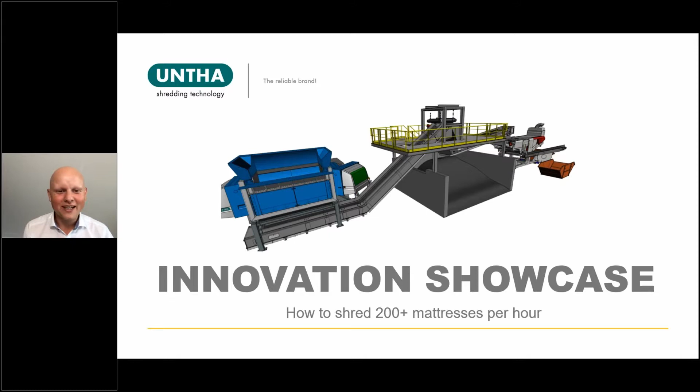With me now is Gary Moore, live from the UK, and he will talk about a very exciting thing. I'm excited about it for the whole day because I myself want to know as well how to shred over 200 mattresses per hour. Gary, I don't want to hold you up. It's your floor. Tell us all about it. Let's go.

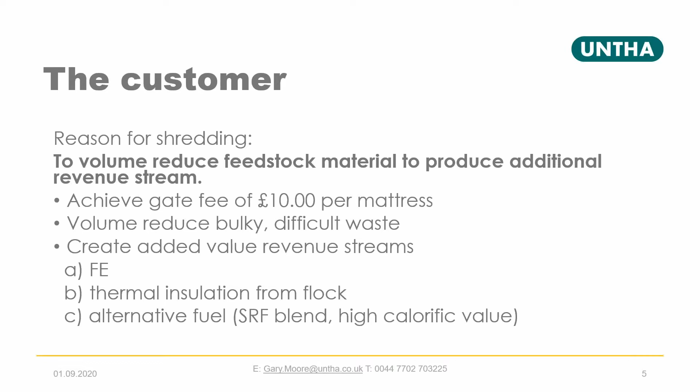Bulk density is approximately 180 to 200 kilograms per cubic meter, and the form is particularly in sizes can vary between a single, a king, a queen mattress. So all forms of mattresses are needed within this system to be able to process. They are post-consumer, and typically what we do with this material is to feed the shredder. We use a grab machine. It's easier to feed the shredder using this method than trying to pick up a lot of mattresses that tend to bounce and spring everywhere with a front end loader or similar telehandler equipment.

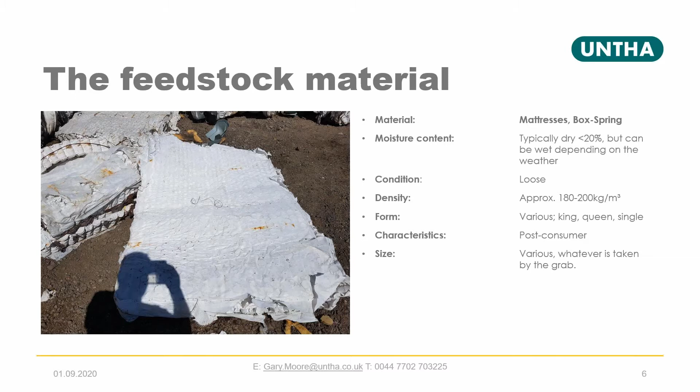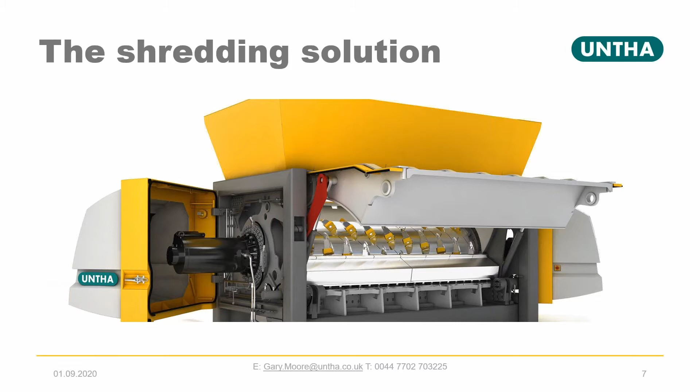The shredder, as I've said before, is the UNTHA XR 3000C, and the 3000 denotes that the cutting chamber length is 3 meters long. We also do a 2 meter version, but for processing mattresses, the 3 meter version is the preferred option in either a static version or a mobile version. We have 2 × 132 kilowatt drives, giving us a total power for this machine of 264 kilowatts. And the screen size we have for processing the mattress material is a 50mm standard screen.

Now, the reason that we're using a 50mm screen for this mattress product is because that size produces and liberates the flock or the polypropylene material from the FE, the ferrous material. The way that the rotor and the configuration of the cutters and the screen baskets interacts gives an extremely high and a very specific quality of separation and liberation of the material.

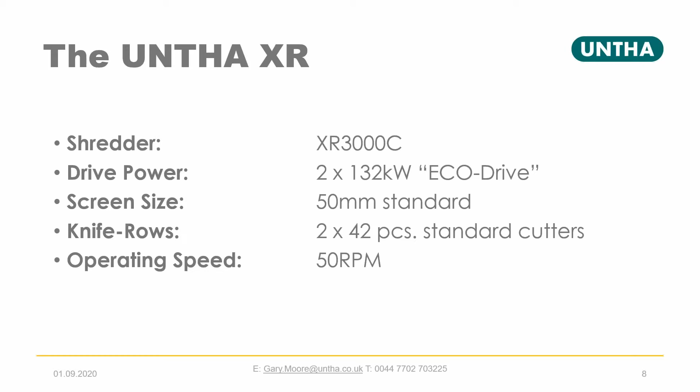So on the machine that we have configured for mattresses, we have 2 knife rows, and there would be 42 standard cutting pieces on this particular machine. And in order to minimize the wear on the machine, because obviously this is a potentially high wear application, the cutters can be rotated or indexed 4 times to give a much longer cutter life. And the rotor operating speed, as we said at the start of the presentation, slow speed, high torque. So we're only using 50 RPM to get where we need to be in terms of throughput volumes for this machine.

So the machine is ultra configurable. We have a bulk feed hopper on this machine, 4-sided feed hopper, very easy to pick up multitudes of mattresses. We will see a video shortly which shows you the mattresses being fed into the machine, and we're feeding the mattresses in there one at a time, so it gives a better view of what is actually happening when we're processing the mattress, and you can see the rotor doing its job as well. But you can pick the grab of mattresses up, maybe 3, 4, in some cases 5 mattresses at a time, drop them straight in the hopper, and that will process those mattresses in the hopper.

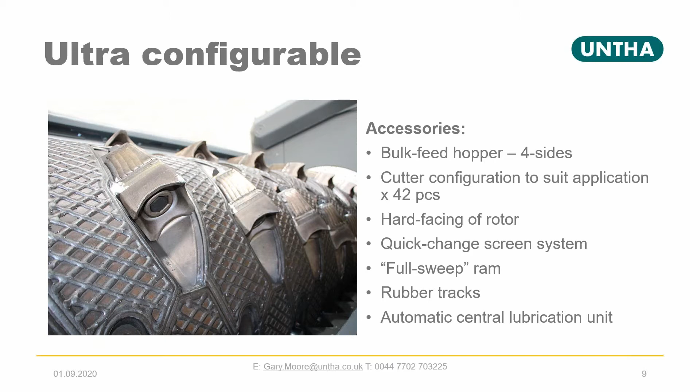The rubber tracks refer to the mobile application, and the complete machine, which weighs in at something like 37,000 kilograms, will sit on its own track-mounted unit with rubber tracks, and can be used and moved to the source of the material. We have an automatic central lubrication system fitted to the machine, and this is obviously what keeps the ram and any other items lubricated accordingly.

So the machine, as we said, can be grab or front end loader fed, but for the mattress application, we tend to feed with a grab. It's a very easy operation, and a single operator can feed two machines. The discharge is via the conveyor belt with an inline magnet. And on the particular system that we're talking about at the moment, in terms of the innovation for processing mattresses, it's also installed with an air ballistic wind sifter.

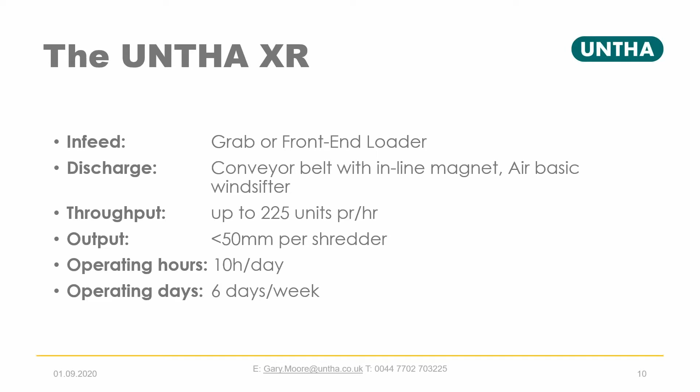Throughput is up to 225 units per hour, and this is per machine. And again, the output there is at sub 50 mil per shredder. And this particular customer, to maximise their performance on the machines, is operating for 10 hours a day, 6 days a week. And pretty much that shows you the service and the performance criteria inbuilt into the machine.

The material goes straight into the feed hopper of the shredder, is then shredded, separated, liberated, and we have the flock and the metal, the ferrous material, dropping onto the discharge conveyor. The discharge conveyor will take the material up to an inline magnet. The inline magnet will remove, on the primary system, the ferrous material and carry that over to the next conveyor. And then we will see the clean flock material being dropped out into the bunker section below.

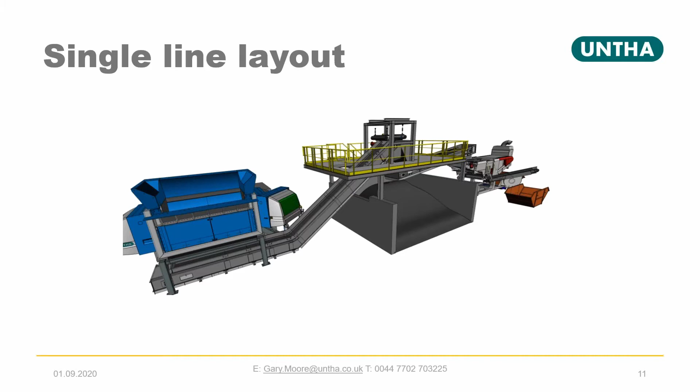Now, what actually happens at that next stage is we have a mixture of the liberated ferrous material and what is left of the polypropylene flock material carried onto that second conveyor. This material will then drop into an air ballistic wind sifter, and the wind sifter will separate the light material, the polypropylene flock, from the heavy material, being the ferrous, and then we end up with another batch of material, which is clean ferrous material and clean flock material.

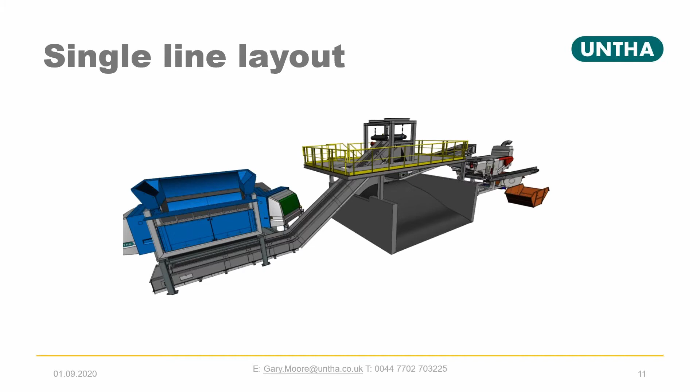And the two flock materials from the initial primary bay and the secondary bay are mixed together, and then we have the clean ferrous material, which would then go to the scrap merchant. So over to you now for the video presentation. This will take approximately between 4.5 and 5 minutes, but we'll show you the system actually working.